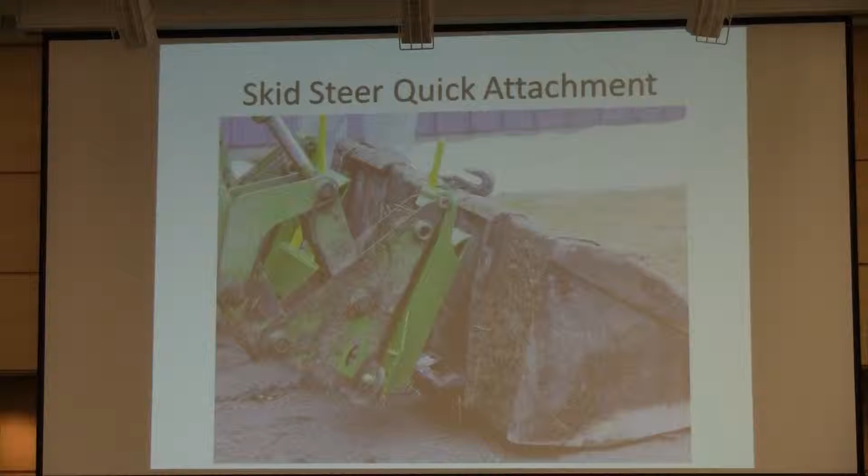Some specifications which we had to meet when designing our product was the amount of use. We made the assumption that it was for the average homeowner and it would get used about once or twice per week during the summer months, but for all day, so we built it fairly rugged. The size of the jaw had a 7-inch minimum opening. Hydraulic pressure available was about 2,500 psi.

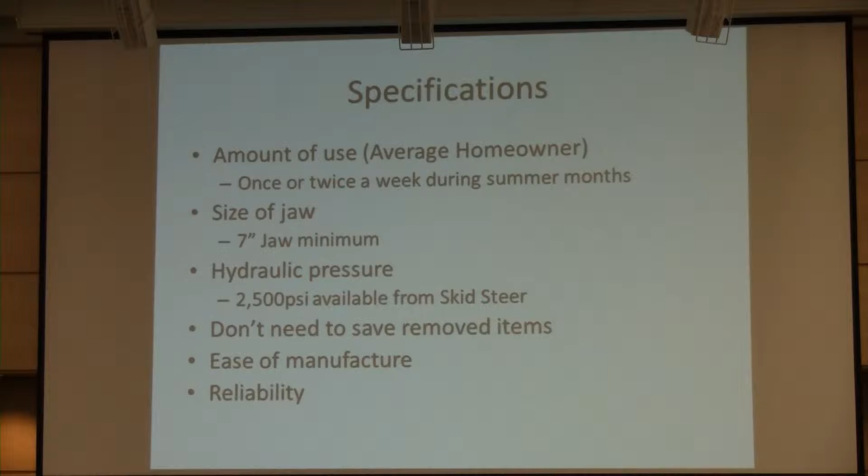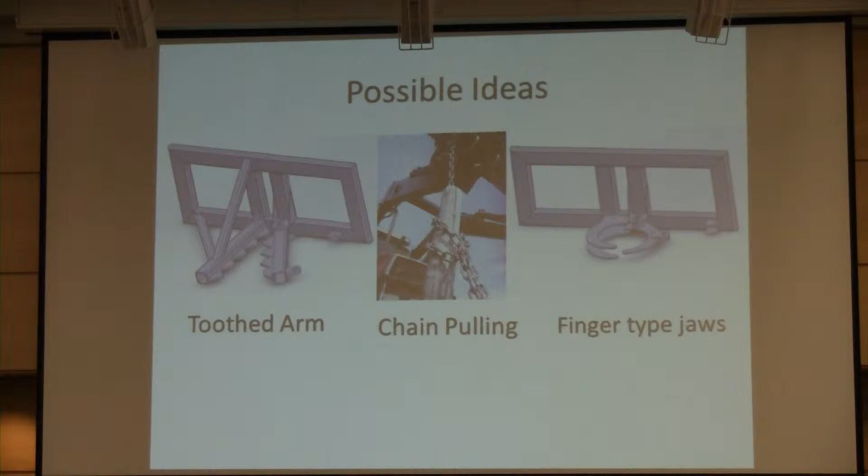With that specification, we were able to come up with 3 main ideas. One is a toothed arm design, fixed with very rugged teeth with a moving arm to bite into the fence post. Next, we had a chain pulling or strap type design, which you would use with logs, or finger type jaws, which would work quite well when grabbing the round objects and would also be less abrasive to the materials pulling. And here I introduce Ryan, who will talk about the design.

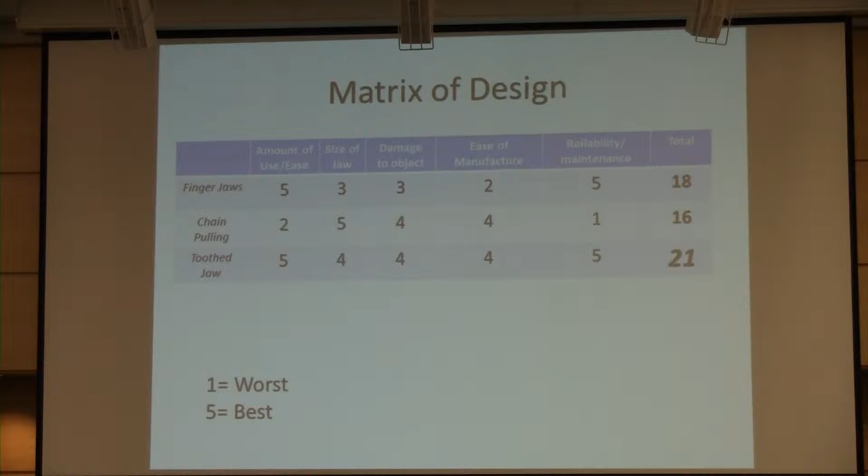This was a matrix that we used, just like all of the other groups, to decide our design. As you can see, the toothed jaw design, which is what we ended up doing, scored a 21, and that's what we decided to do. This here is an isometric view, or basically just an all-around view of our final project. Even though it was a very basic design, there was still a lot of work that had to be done

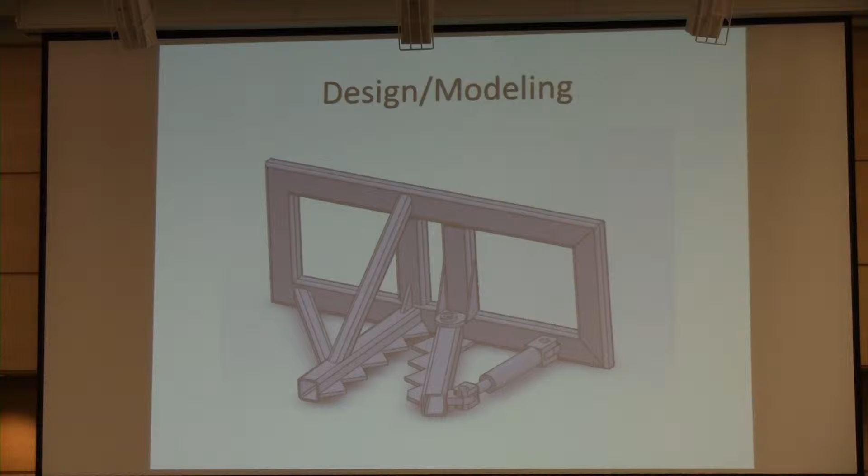in SolidWorks. Most of the work went into finding a good place for the hydraulic cylinder mounts, which you'll see there and there. And basically the position of those dictated how far the jaw could open. We needed to maintain our 7 inches, but also if we moved the jaw or the mount over, it would also affect the grip that we would get, so our 3,000 pounds specified.

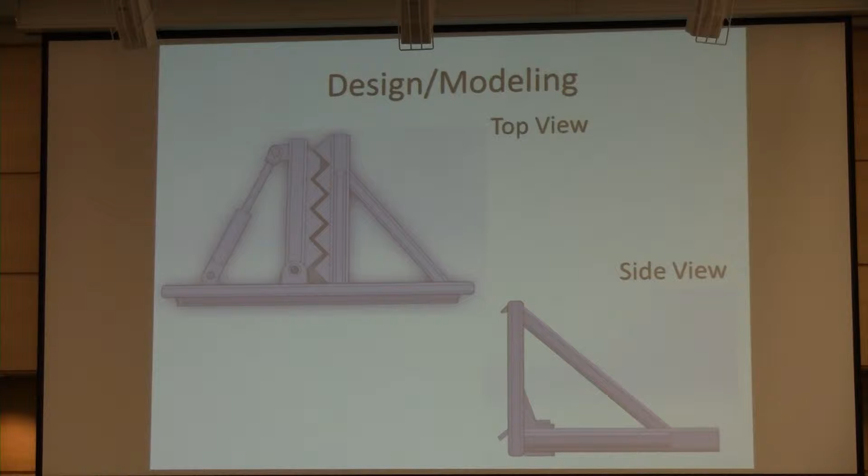The top picture clearly shows the jaws and the teeth, which would move, and the bottom picture clearly shows the supports on the fixed arm, so that was not intended to move under any circumstances. Top shows our back, or that would be for the quick attach. So that would be compatible with the plates that were specified earlier. And the front would also show that vertical support for that fixed arm.

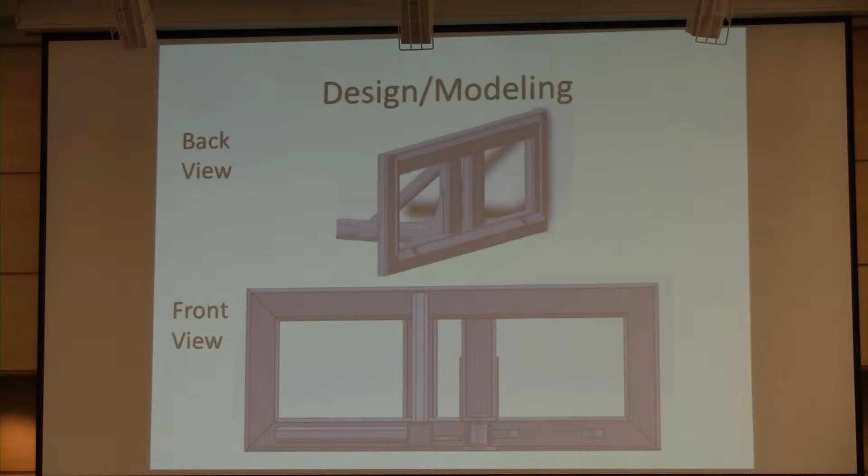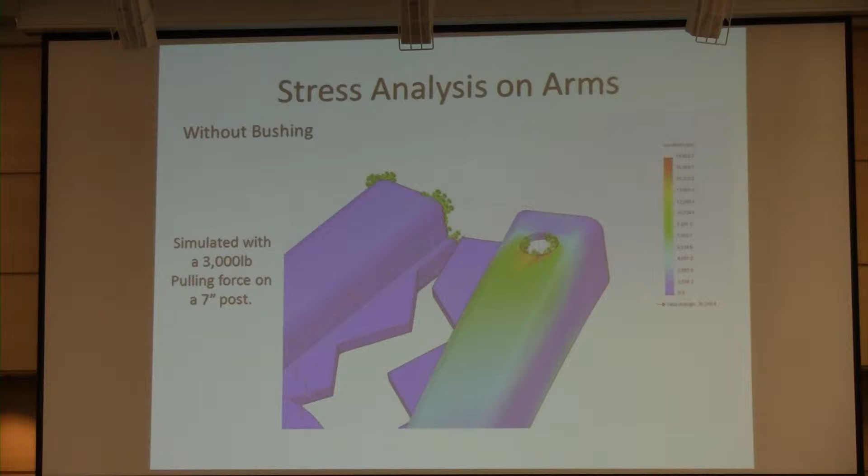A lot of analysis did go into the stress analysis. And basically, what you see there, that hole is our main pivot point. So that takes the responsibility of the moving arm for taking the load, and also it needs to pivot on that. So basically, we started with this design and a hole drilled straight through the square tubing.

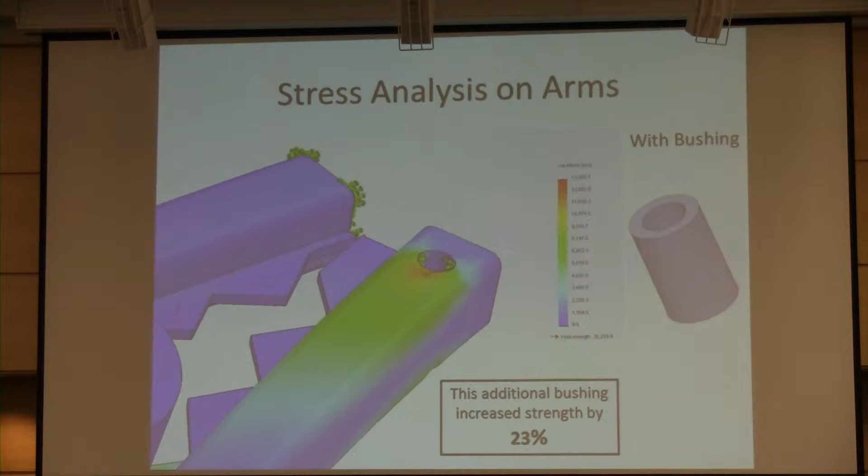What we decided to test was if we introduced a bushing, this would be the bushing that we had. Basically, a bushing is just like a sleeve of thick steel, and it would disperse the force out instead of focusing on very small shear points on the bolt. And when we introduced that, we found that the stress in this arm would be reduced by 23%. Not only would it reduce the stress, making the arm stronger, able to bear more weight, but it would also increase longevity on our bolt.

The same was done with the hydraulic mounts. The left shows the original design, and if you can see there, the mount is to be welded directly to the frame. And then what we thought of was that would see a lot of stress, and it did, and that would ultimately deform.

So what we did, that plate is a 3/8 stock. We put that in between the steel box frame and the mount, and it actually increased the strength of those mounts by 81%. We did that on both mounts, and it proved that it would not deform under extreme circumstances.

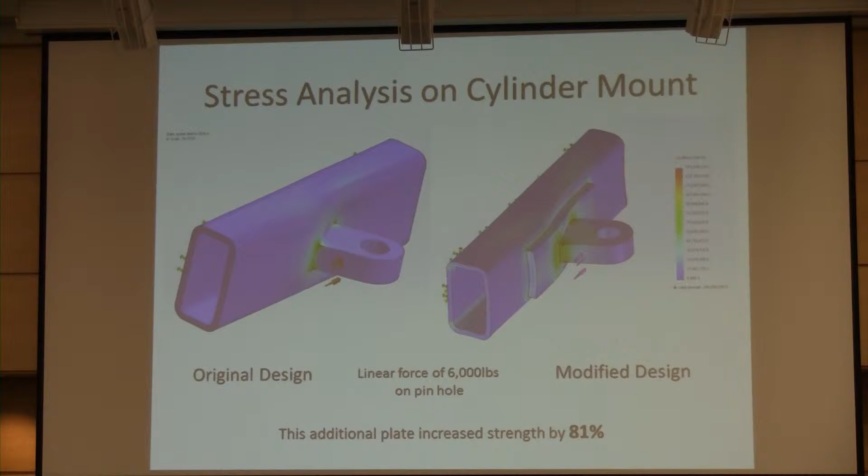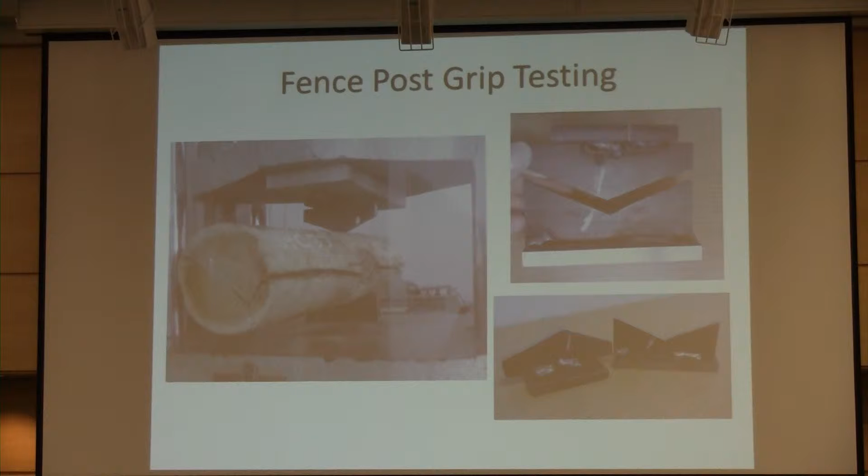We did do a few preliminary tests, and one of them was to see just how much force it would take to actually bite into a cedar fence post. We used a 4-inch cedar fence post and mocked up these replica teeth. We used a Tinius-Olsen testing machine, and basically all that does is exert a compressive force. And what we found was about 3,000 pounds would be sufficient.

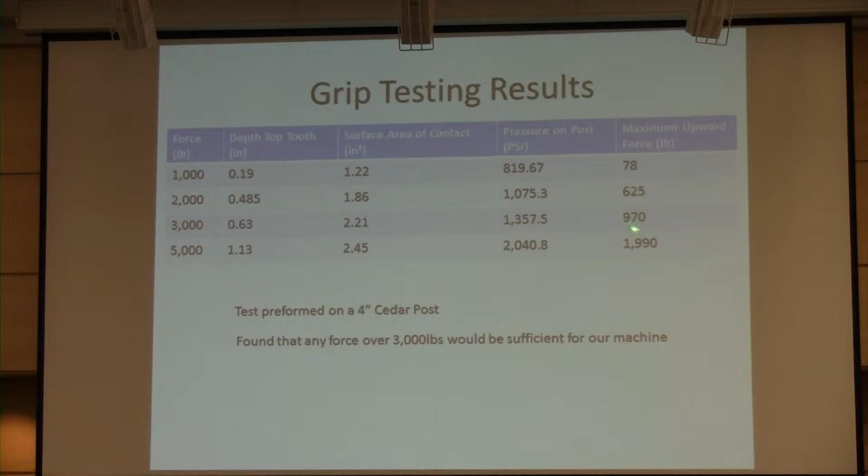So that was the design that we basically started with, that helped us select our cylinder, and also the geometry of our mounts, as I was talking about earlier. This table shows the results from that grip testing, and basically what that shows, at 3,000 pounds, the top tooth dug in 0.63 inches, and it exerted about 1,300 psi. And this last column shows if you were to lift it up vertically, it would be able to withstand 970 pounds before it would shear.

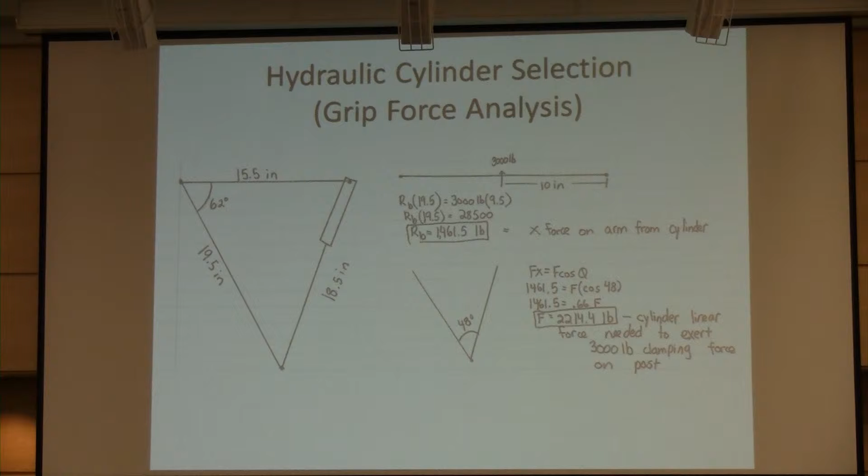I'm going to pass it off to Andy, and he's going to cover the construction. So during the construction phase of our project, being pretty much all metalwork, it included a lot of welding, shown by Ryan here, a lot of grinding, which I did a lot of, and we also included a lot of plasma cutting.

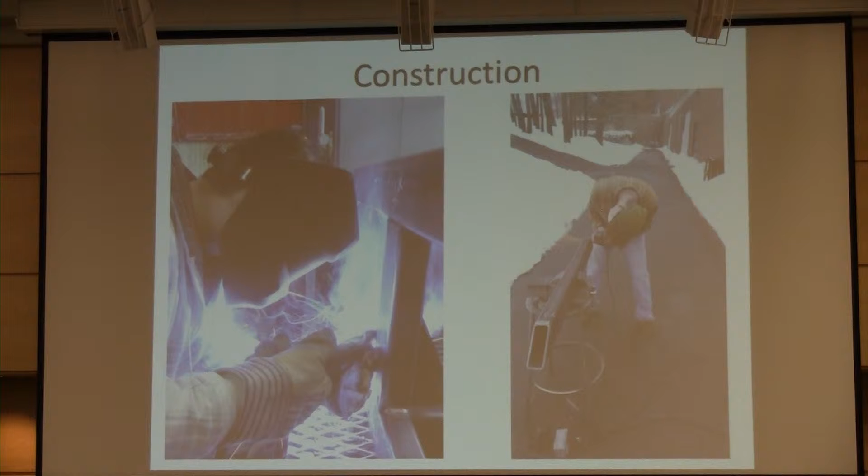We figured out the equivalent of this if you could support the bolt in a manner where it would have a direct shearing force. You could hold up 51 Honda Civics before that bolt would snap, or 37 Toyota Camrys. So that bolt is definitely overkill in the amount of strength there. However, we wanted a large bolt, so there was a lot of surface area on the bushing because it was also a pivoting joint.

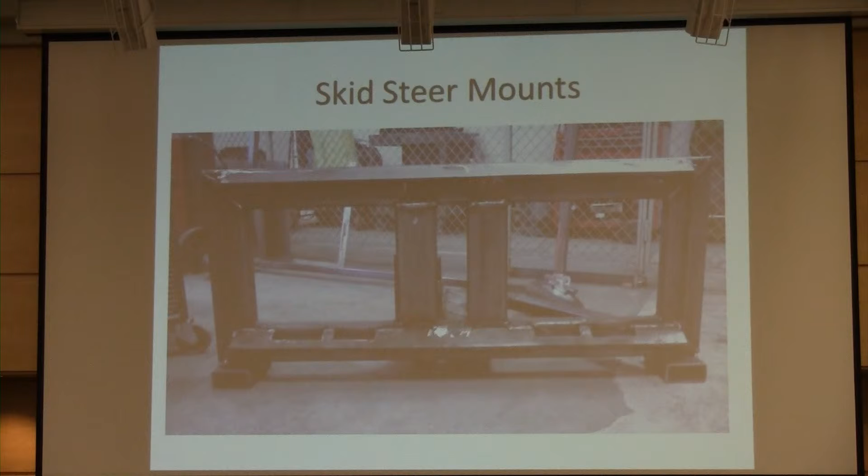This image here just shows the back side of our project and the mounting which we had to weld on to make a quick attach plate, or basically make our own quick attach plate. You can see the pocket on the top as well as holes on the bottom for the pins to latch into.

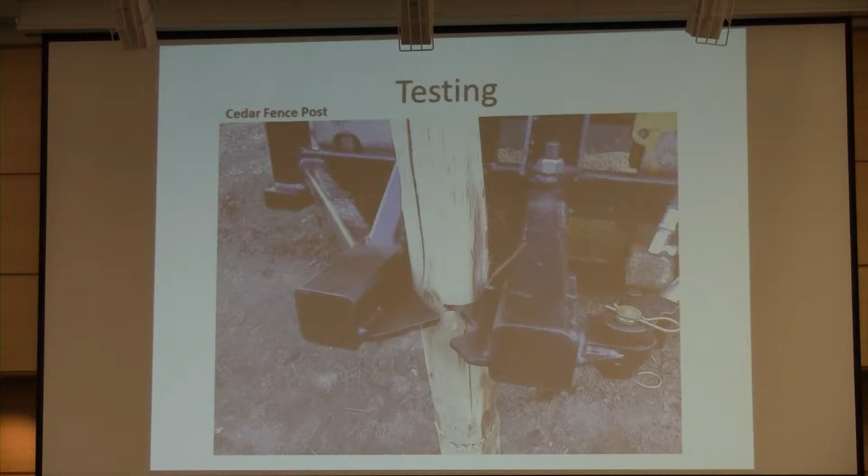We did some testing on our project. This just shows it set up on the John Deere skid steer down at the TC farm. It looks and worked quite well. Here we were testing that same cedar fence post which we tested previously and preliminarily with over 6,000 pounds of force at the jaw. It definitely bit in a substantial amount, and unfortunately we were unable to pull a fence post out of the ground. However, with a bite like that, there is no doubt that it would be able to do it.

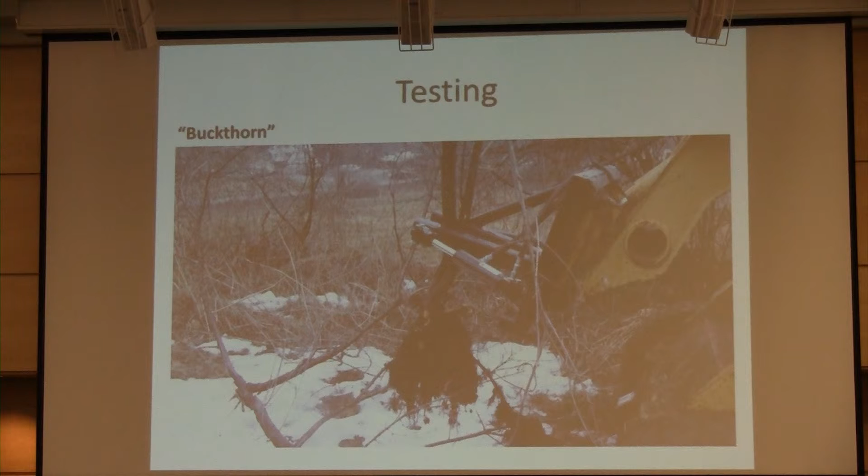Our project was also to pull out small brush, and so we did that too, and this successfully pulled out a cluster of buckthorn, root ball included. It is a very invasive plant and very difficult to get up, and we successfully pulled this up. And being how it can pull up a root ball, it reassured the fact that it would most likely be able to pull up a fence post.

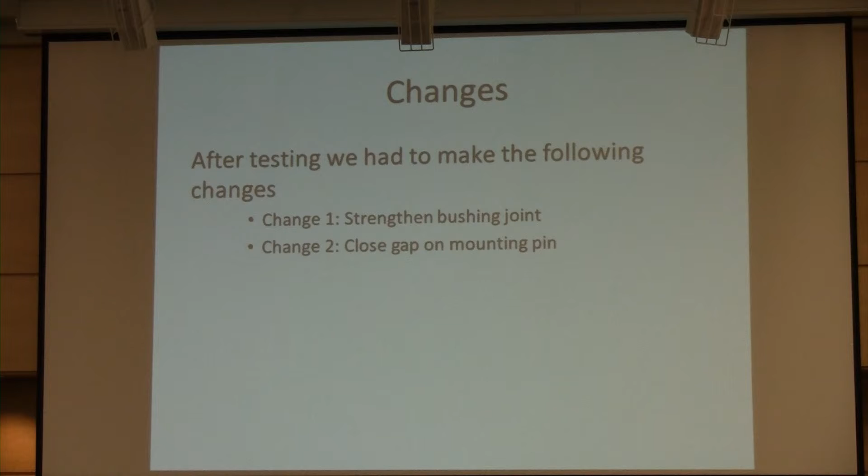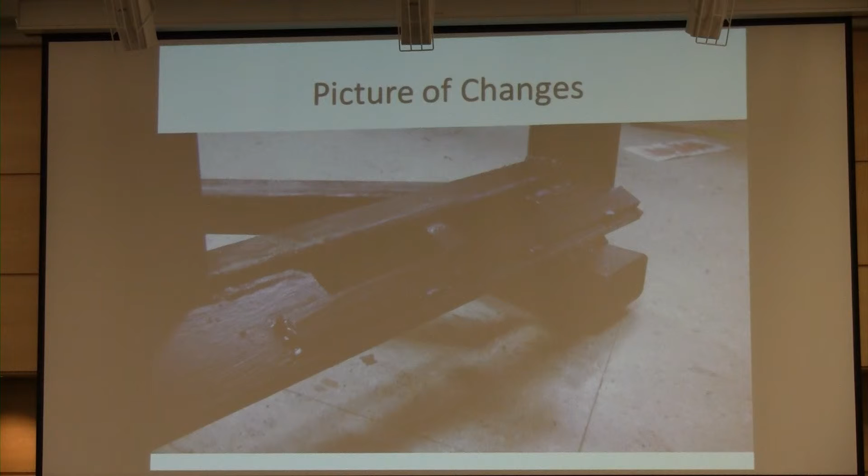Here's Ryan back to talk about some changes. After our testing, that first testing that you just saw the picture of, we did find a problem or two. The first problem was the strength of the bushing joint, which I'll cover, and also the plate, because we needed to fabricate our own, it didn't fit quite right onto the quick attach. So what we did to solve the problem with the plate, I'm not sure if you can see it, but there's an extra strip of 1/4-inch steel there, just welded, and that made it fit tighter onto the attachment.

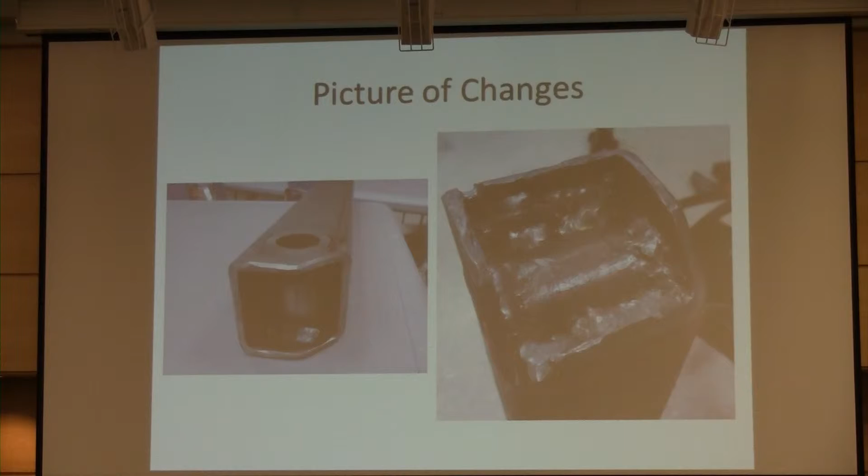We thought that we did a very good job, and we were very proud of our product. A few things that we would maybe do differently: probably accommodate a wider opening for the jaw, and also we got a little overzealous with welding. So basically, that bottom mount probably could have been addressed if we just kept it tacked, tested it on the machine, and then we could adjust it easily. But we were just going by measurements.

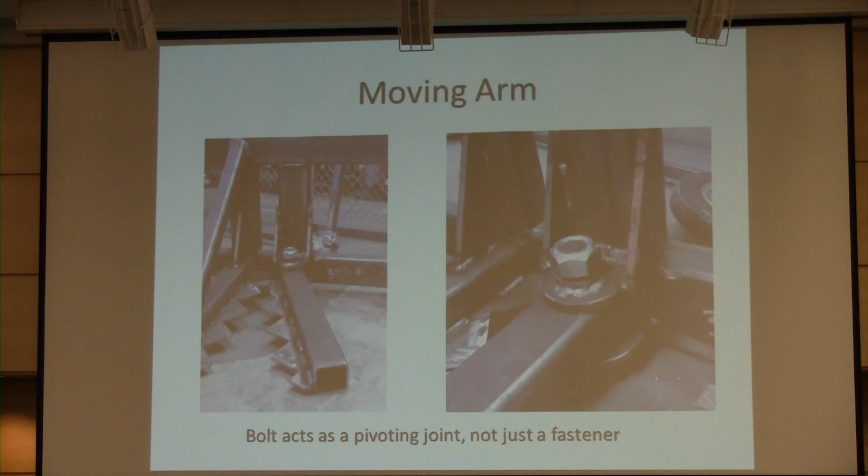Are there any questions? Yes. The fixed arm has that 45-degree support. Why didn't the rotating arm also get one? The rotating arm did get one. It was on that top plate. Let's see if I can go back. It's not mounted directly onto the arm. If you notice here, there's two plates, which this square tubing is sandwiched between. These are the gussets for that, to hold that up. So that acted the same way.